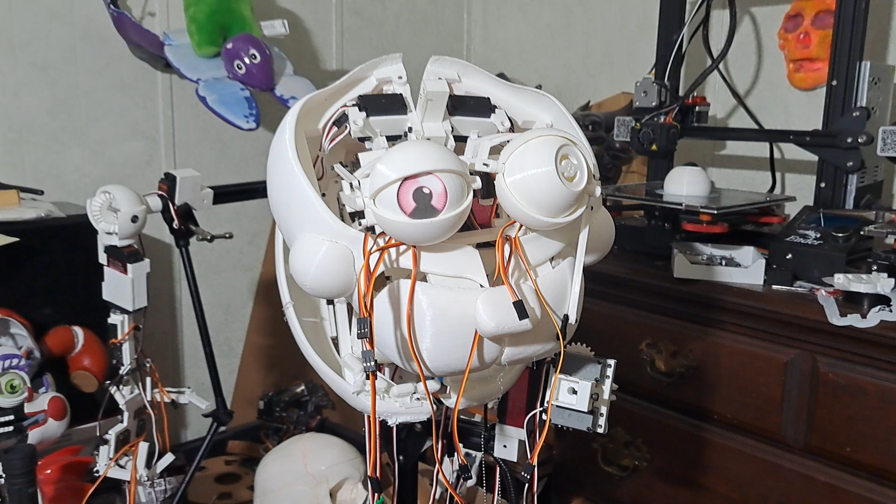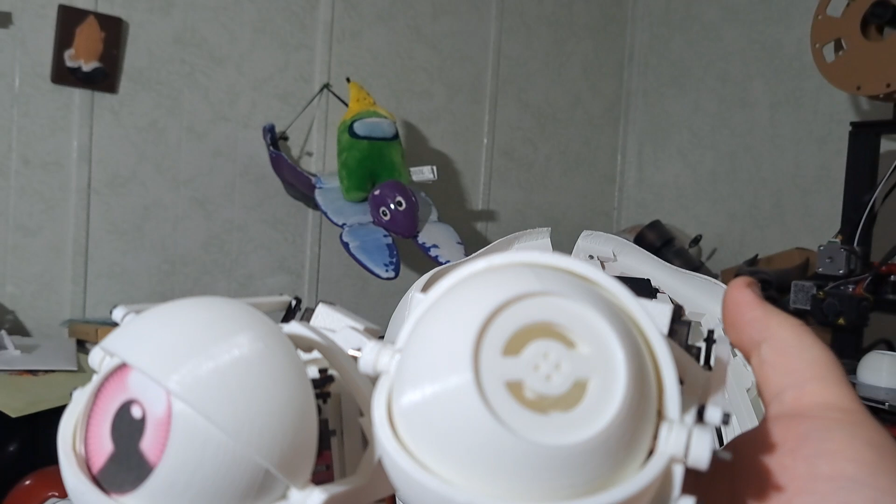So here's another update video for the last one. So, for his eyes, the main issue was that right now his eyelids aren't getting perfectly aligned because of this spacing issue back here in the back. I did alter the servo holder a little bit to kind of make up for that, but it's not working. So,

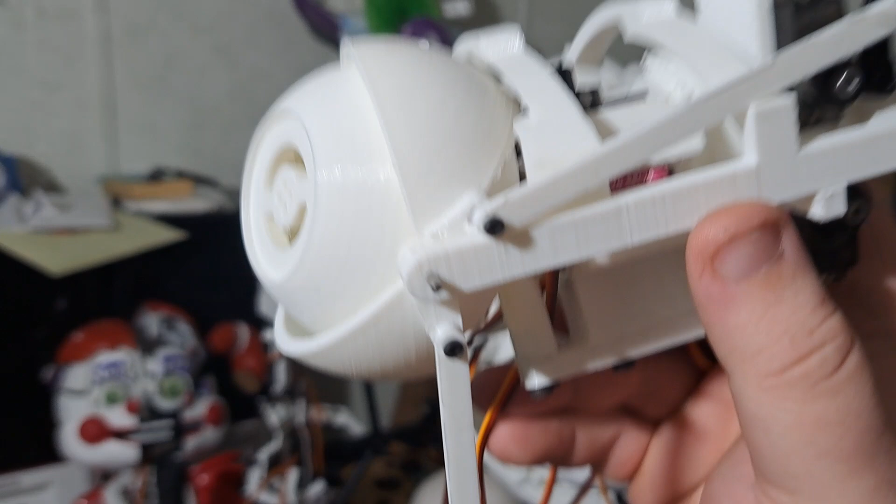this piece right here is supposed to hold up the actual eyelid holder part, so it doesn't get dragged down, but also it's too far down. So it's too far down and too far to the left. First option didn't work, so I have another option.

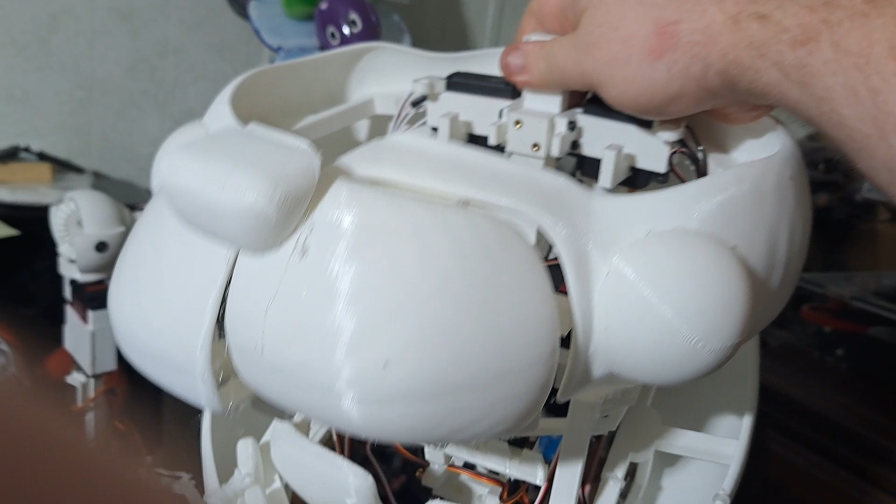For his neck, as we know, all that weight in the back is causing his head to be back heavy. And also, take note of how far the joint is from where all those servos are stacked. It's way too far forward, and the servos are also way too far forward. And you'll see how it kind of lost all strength, so yeah, that happened. So to fix it, I've done a couple things.

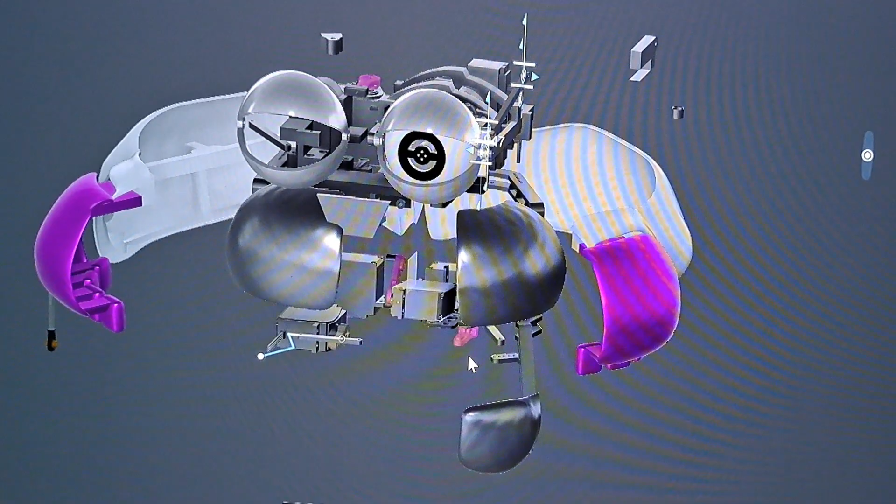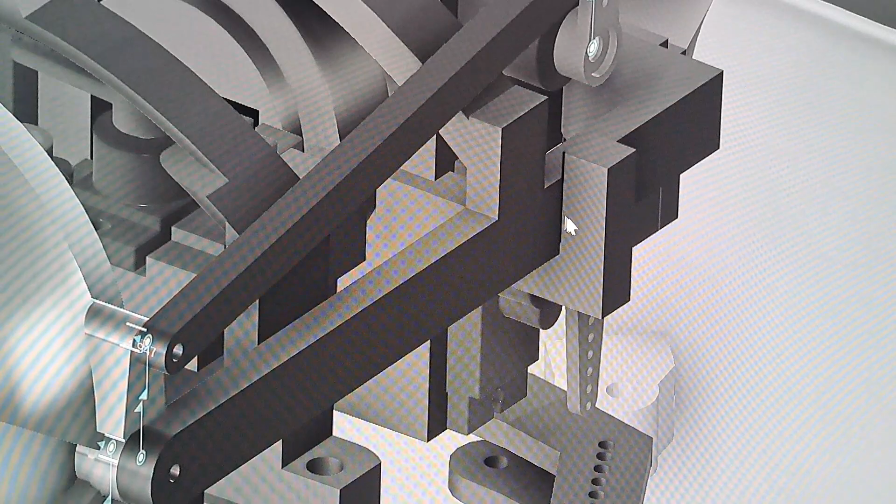For one, for his eyelid holder, instead of having it just hold it up, I've also added this part to hold it to the left. Or I guess the right. I also bumped this up like 1.5 millimeters. Technically, this part is going to be clipping into this part, but since it's not aligned anyway, it doesn't matter.

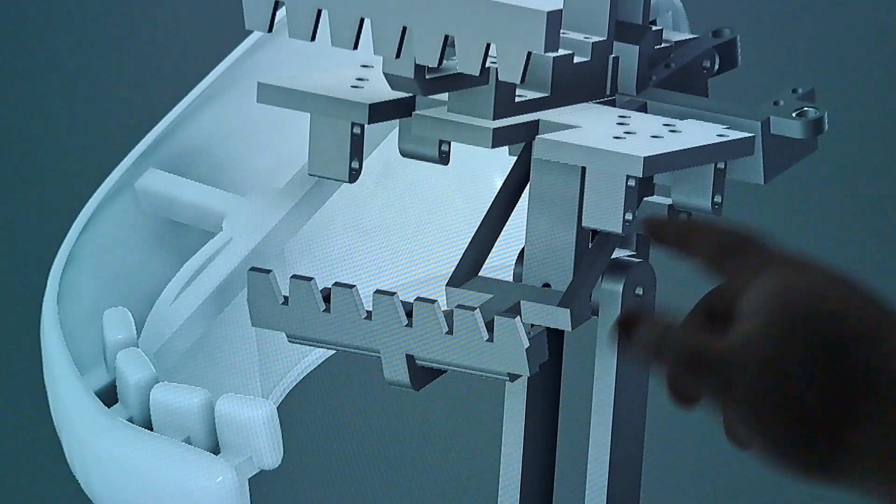Now, for his neck, the major change. So, for his whole neck design, I had to completely redo everything. For one, his endojaw is completely different than what it was. Originally, it was just a spine that goes all the way through and connects to the back here. Couldn't have that, because this had to be in the middle, and this part here is also in the way. So I had to just build two arm pieces that come around and connect to the endojaw. It still lines up perfectly. I just had to really work around a lot of things.

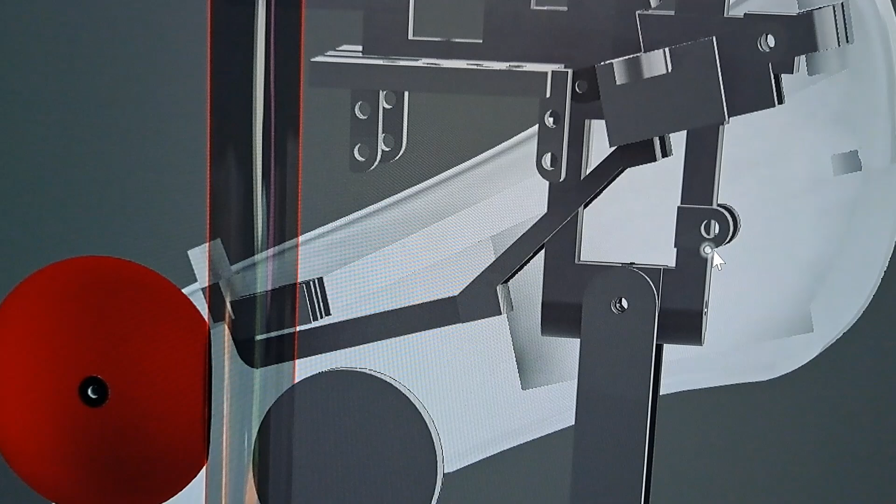For his neck, pretty much I use the tower that the other servos are going to be on, because this tower is going to have servos on the sides here, and this servo for his outside pieces, his outside shell, is also right here. So pretty much all the weight's on this one tower area, and that's perfectly aligned with this joint.

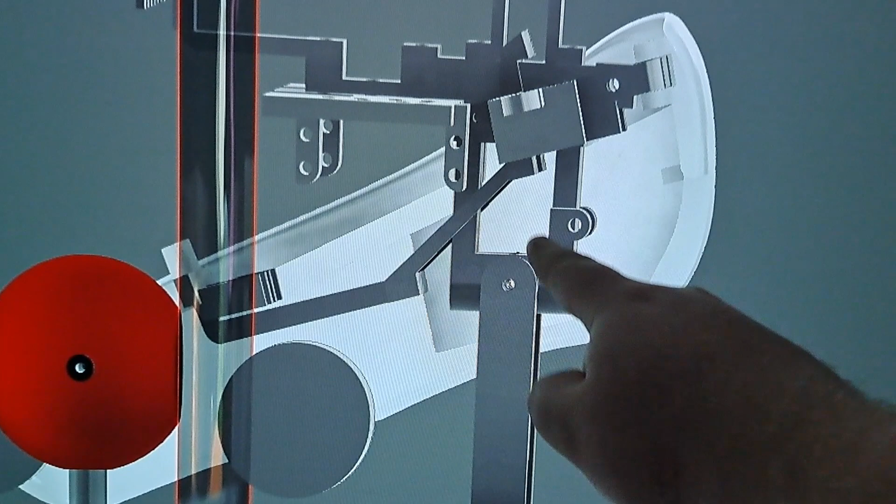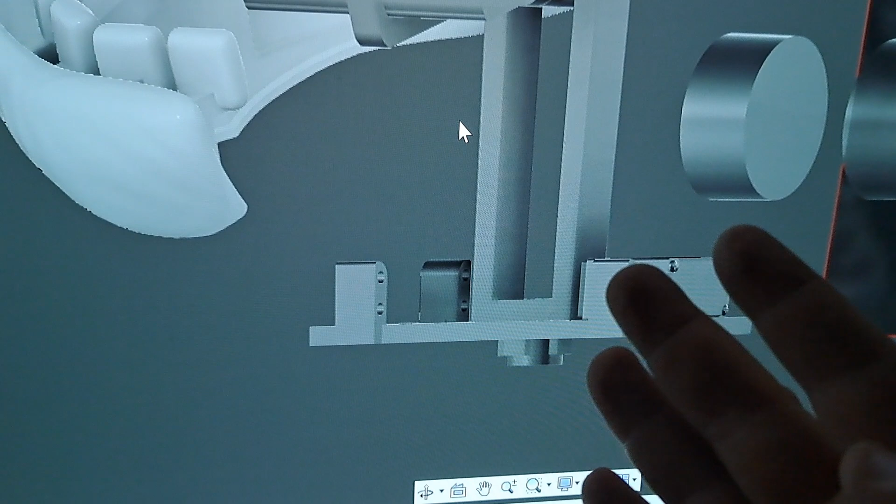Now, one thing I don't like about it is how far this is from way up here. Originally, it was like right here, but now it's way down here. So now when I attach a servo to this, for it to turn his neck, whatever mechanisms I have for where his shoulder would be, this might be interfering with it. So that might be a problem down the line I'll have to figure out. And it's not that it's got to be taller for the weight. No, it's because of how his jaw works.

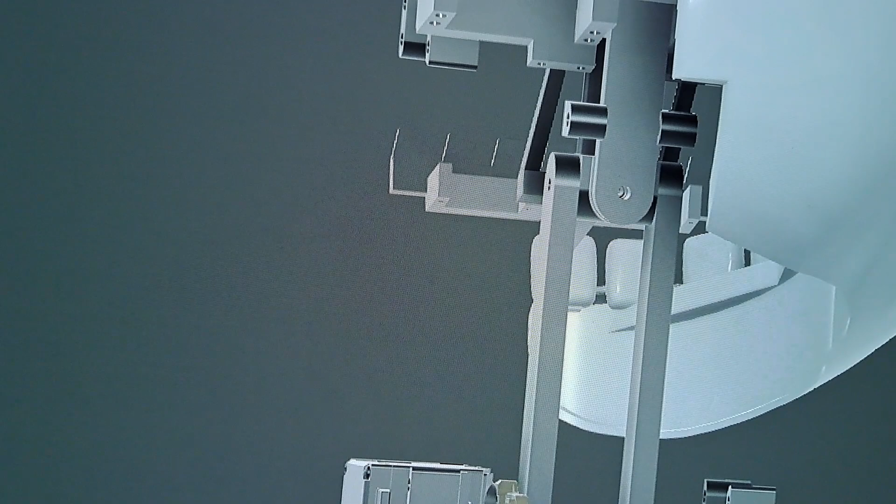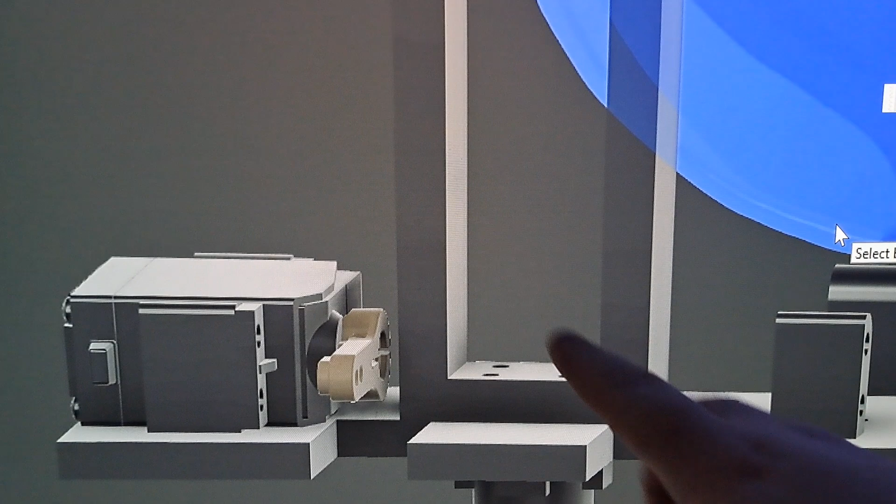So whenever his neck is being moved, I don't want to, why would I want to move a face? There we go. Let's say he tilts his neck to the left or to the right, that's what it's going to look like when he moves. And it possibly clipping into the servo or the part itself is an issue. Now granted, this is with his mouth open. In this position, his mouth is fully open. I think it's at 30 degrees his mouth's open.

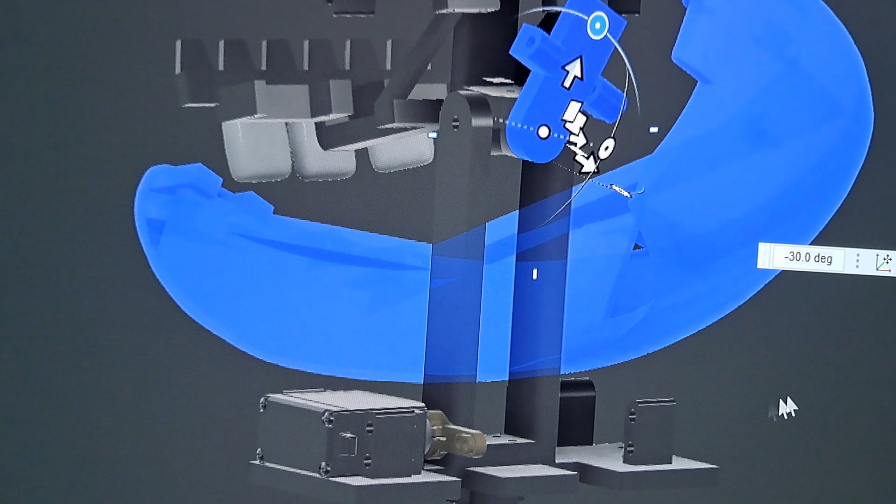I can't remember. But I had to bring it down because if this was any higher, this would just be bumping into this. Now, I could reprint this whole part. I don't want to do that because this is a lot less filament than this will be. But I might have to in the future, depending on what happens.

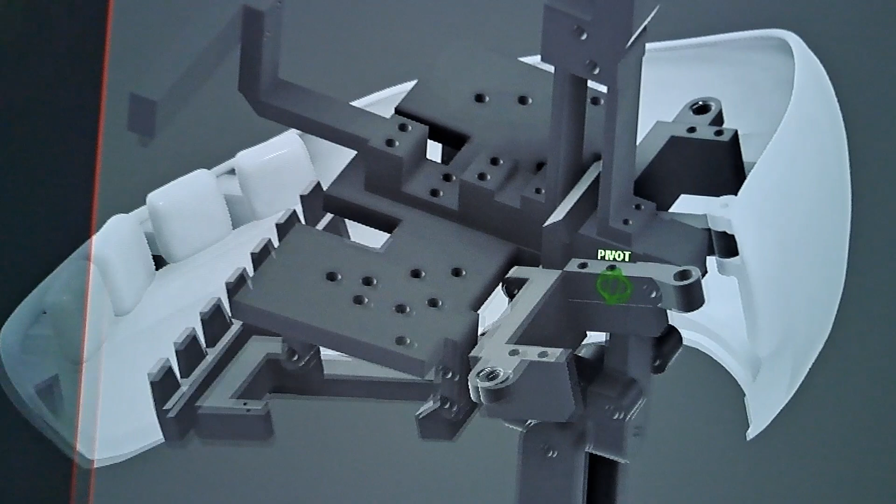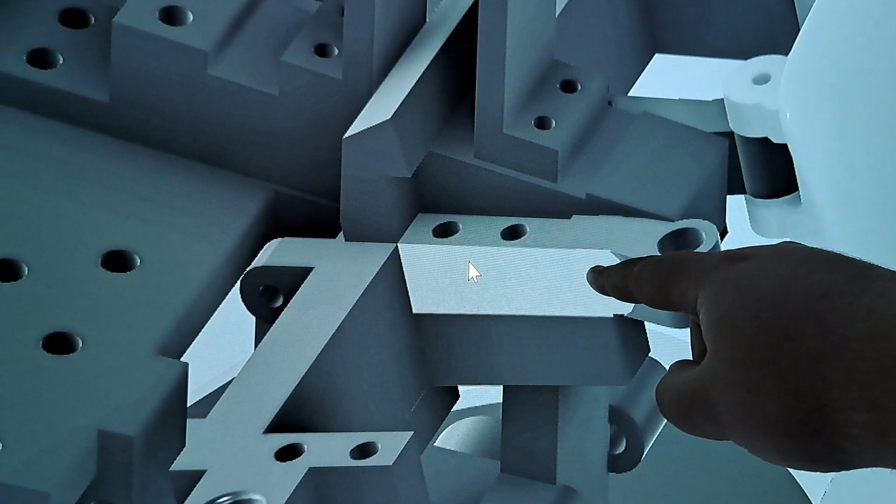So for the actual outside jaw servo holder, this right here, originally it would connect at the bottom to keep these two sides together. But I made this part right here. This perfectly fits in between this gap for the servo tower. Also, I had to redesign this whole piece here because of a T-spline issue. Basically a modeling issue.

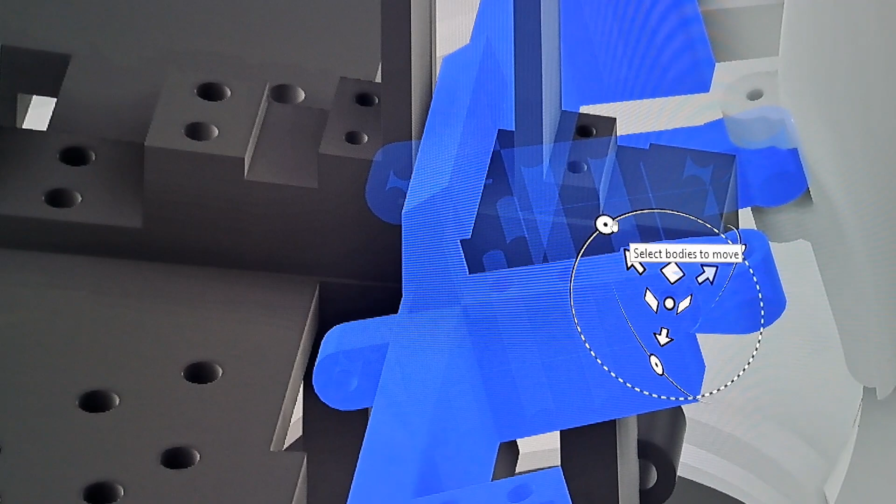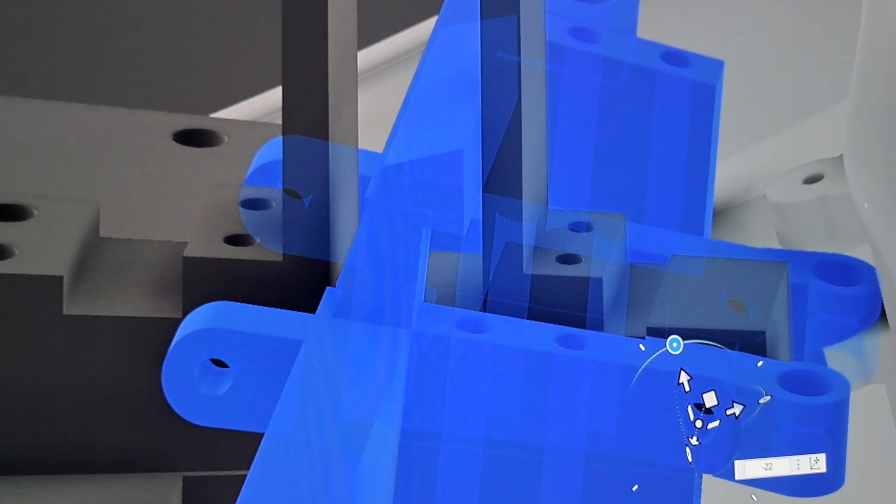So let's say I bring this back. What was it? I think it was like 25. No, it's 15 degrees. Full, when his mouth is at its normal closed position. I think negative 22 is where his teeth are touching. Yeah, at 22 degrees his teeth are touching together where it's perfectly closed, and 15 is when it's slightly open, and then 15 from that is when his mouth's fully open.

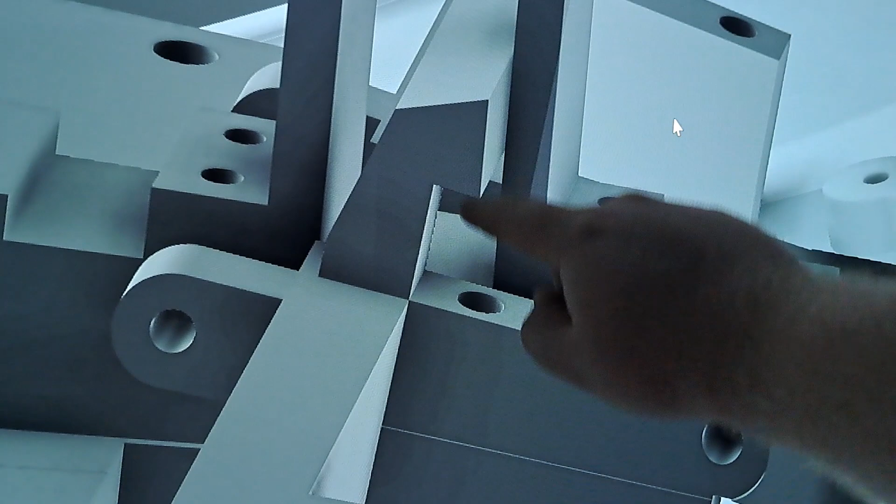But you see it perfectly just arches over the spine right here, so I don't have to worry about when his jaw opens, it's gonna bump into it. Hopefully, I haven't tested with this because this is where the servo will sit here. It connects to here. It basically goes up and down, barely touching the side here. I don't even know if the jaw can open 15 degrees.

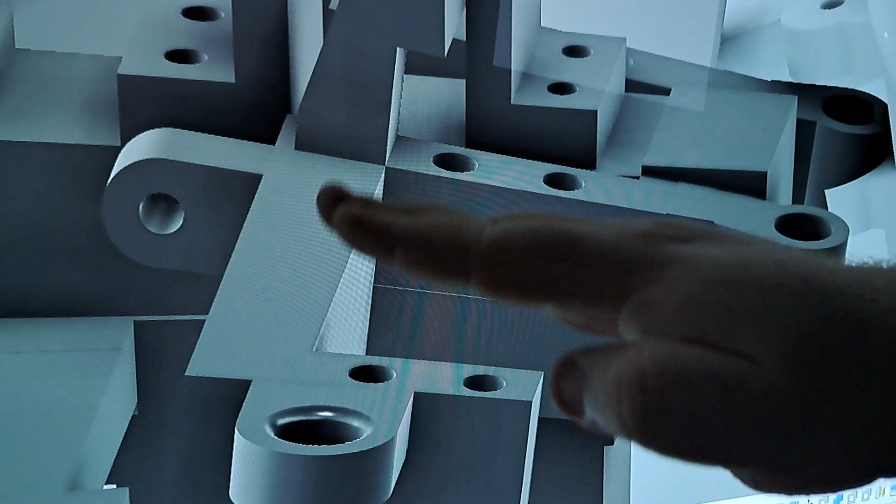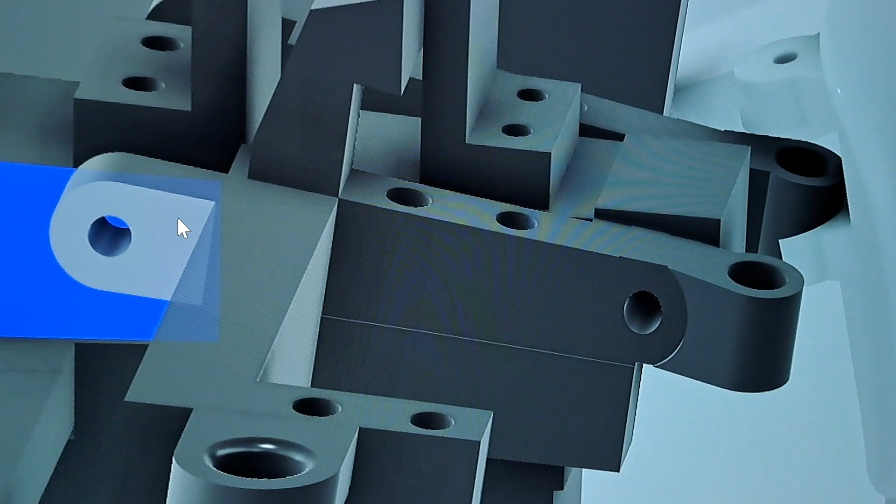I haven't checked, but I used a reference from an old implementation where, since the bottom of this was connected, it would be flat and then arch upwards. When this spine, as I call it, arched up, it couldn't do that because there was the flat bottom in the way. So I basically carved at an angle, like this angle right here, into the spine piece, so it's empty space. It could just go right into it, no problem. That was also the main reason why I had to redo this whole part, because I tried editing that part away and it almost crashed all of my progress after 2 hours.

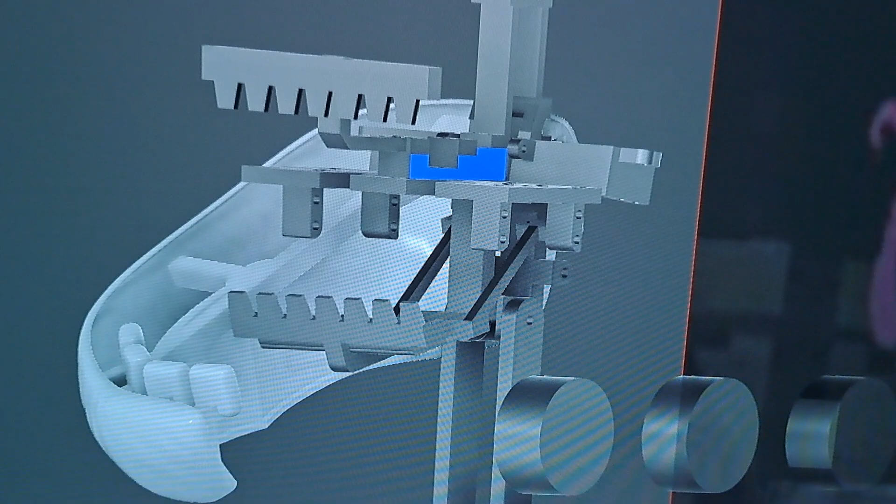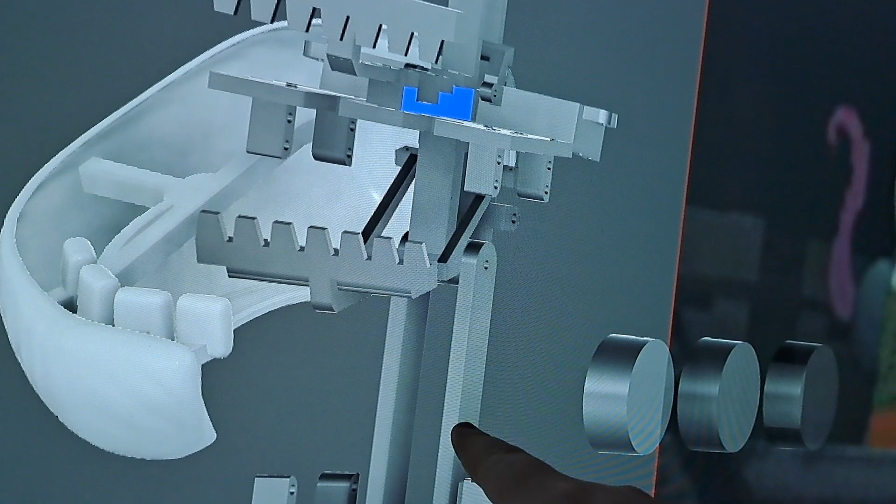So that's pretty much what his jaw is going to be looking like, and I'm not sure how stable it's going to be. I don't know if it's going to be any more stable or better. Given where he is now, with his metal frame, since the servo connector that makes his head look left and right sits on the metal frame, he's going to be a lot taller. So that's going to change. Don't know if that's going to be a bad thing or a good thing, but I guess we'll see.